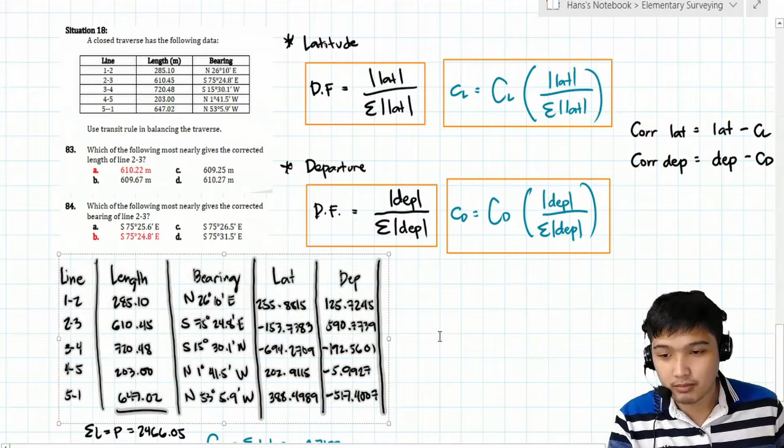Proceed tayo sa sample problem number 18. A closed traverse has the following data. Yung data dito class is the same lang doon sa last problem natin, sa situation 17. Kinopya ko na lang ulit itong mga nasolve natin before, yung initial latitude at departure nila, pati yung mga corrections. Alam mo na yan class, inulit ko na lang. So, use transit rule. Ang tinatanong, which of the following most nearly gives the length of line 2,3 and the bearing of line 2,3. Same lang class.

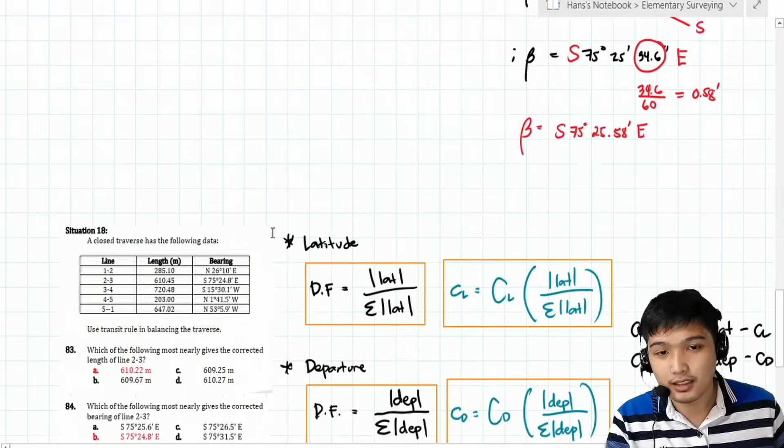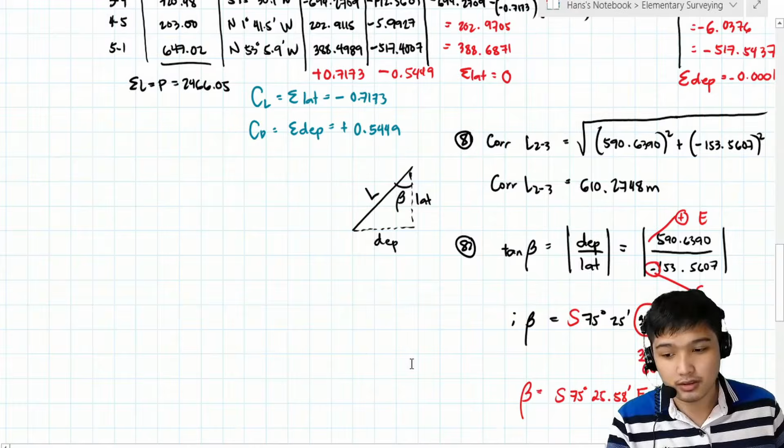Ngayon, recall lang natin ano nga yung na-solve natin last time. Yung bearing is ito, 75°25.6'. At yung length niya, ito, 610.27. Hindi natin naasahan class na same yung bibigay niyang result kasi different methods.

Okay, start tayo class. Recall natin that magkaiba yung distribution factor sa transit rule. Yung transit rule is iba yung distribution factor niya sa compass rule. Dito, distribution factor kapag latitude ang pinag-uusapan, absolute value of latitude over summation ng lahat ng latitude, absolute value. Sa departure naman, ang basis ay yung departure niya, over yung summation ng lahat ng departure, absolute value.

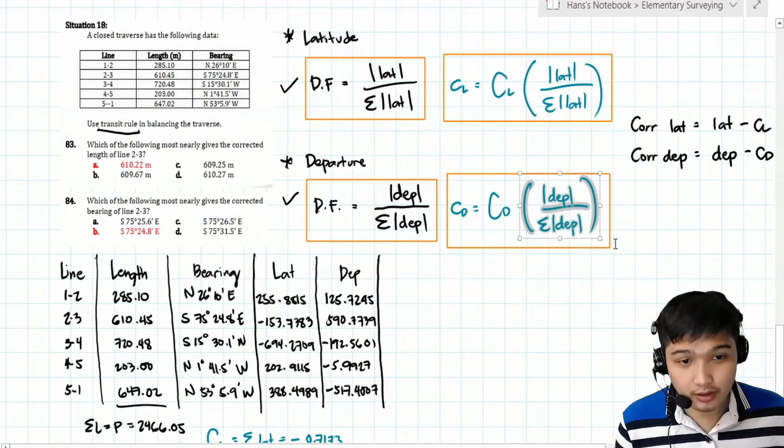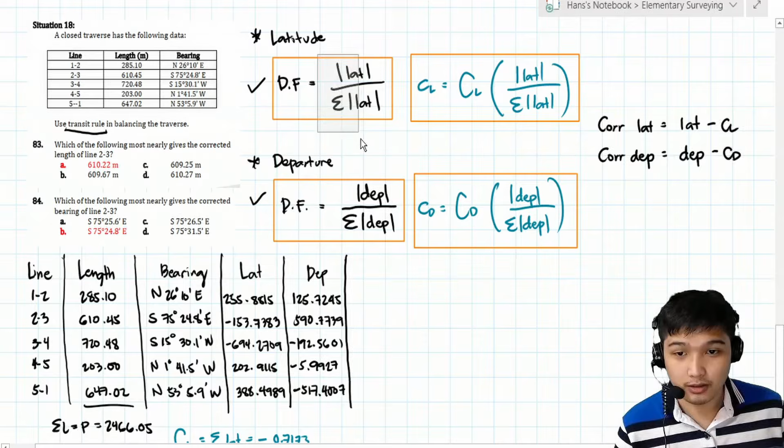Tapos, lahat the same na. So, individual correction, ayan, total correction times the distribution factor. And then, therefore, the correct latitude and departure is yung erroneous latitude and departure nila, minus yung individual correction. Ibig sabihin kung ano yung ginawa natin last time, ganun lang din dito. Ang magbago lang is itong distribution factor. Okay, start tayo class.

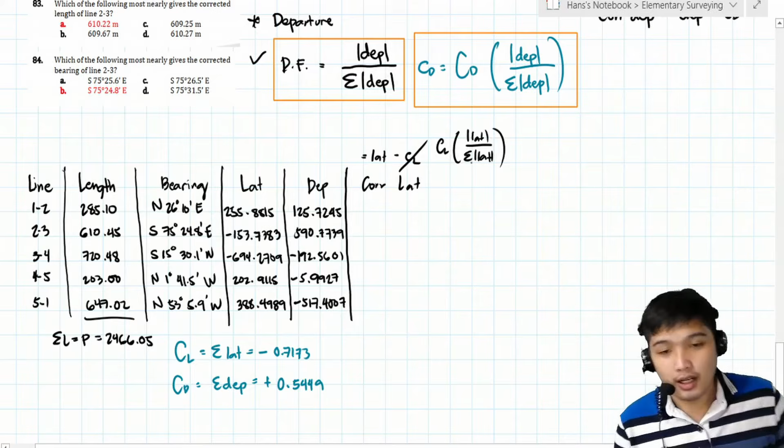Baba ko lang ito. Gagawa tayo ng additional column para sa correct latitude. That is equal sa dati niyang latitude minus correction sa latitude, which is yung capital CL times the distribution factor, absolute value of latitude over summation ng lahat ng absolute value ng latitude. Ngayon class, wala pa tayo nito, yung summation ng lahat ng absolute value ng latitude. Kunin muna natin yung class.

Ilan ang summation ng absolute value ng mga latitude? Without consideration ng mga sign. Ilan yung summation ng mga latitude class? Sagot is 1695.3011. Pa-verify na lang class.

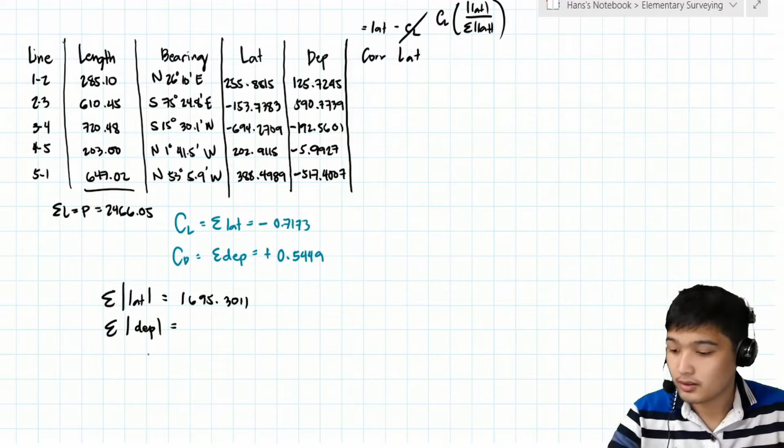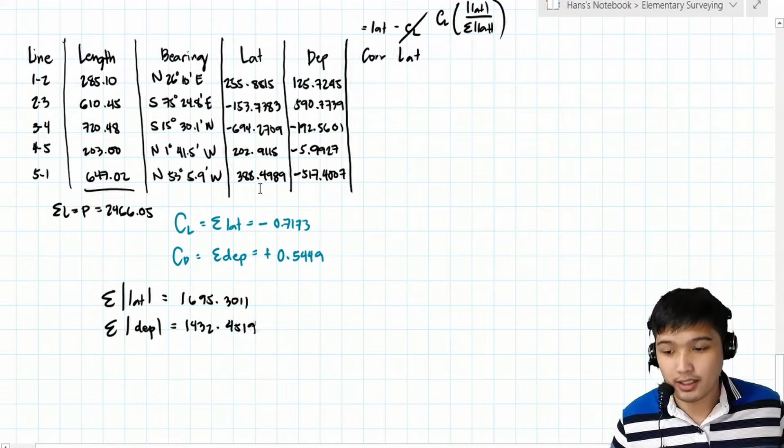Tapos, kunin na rin natin yung summation ng lahat ng absolute value ng departure para sa mamaya. Ilan yan class? Sagot is 1432.4519.

Okay, start tayo class sa correction o corrected latitude. Paano yun? This one is equal sa previous latitude niya, yung 255.8815, minus yung correction. Asan yun class? Ito yan, di ba? Minus negative 0.7173, at distribution factor, latitude niya, pero absolute value. Yung positive sign lang yung kukunin natin.

That is 255.8815 divided by yung summation, yung 1695.3011. Ilan yan class? Ilan yung bibigay na corrected latitude? So that yung corrected latitude equals 255.9898. Nakuha ba yun, class?

Ulitin natin sa next line. That is yung previous latitude niya, yung negative 153.7383, minus. Copy lang natin siguro, ito. Ang magbabago is what? Itong numerator, magiging yung latitude niya, yung absolute value ng latitude niya. That is 153.7383. Ilan yan, class?

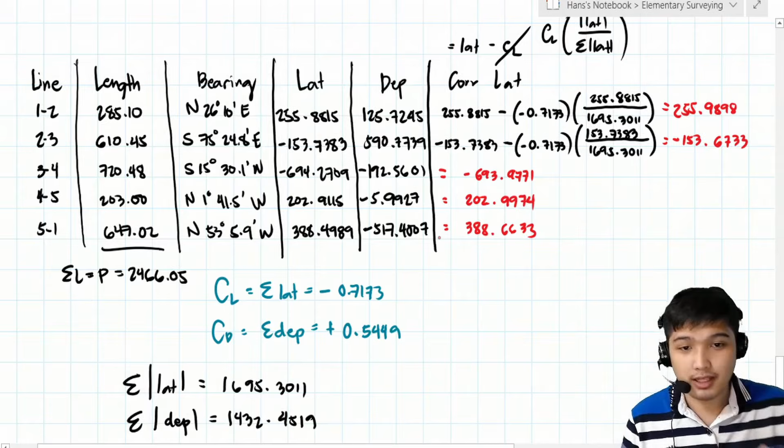Okay, ayun na, class. To verify na tama yung nakuha nating values, gagawin natin yung ginawa natin last time. Dapat yung magiging bagong summation must be equal to 0. Sige nga, class, try natin. Kunin yung summation ng mga bagong latitude. Ilan yan, class? It's either 0 or near 0 due to rounding off. Okay, so that is almost 0. Lumabas is 0.0001.

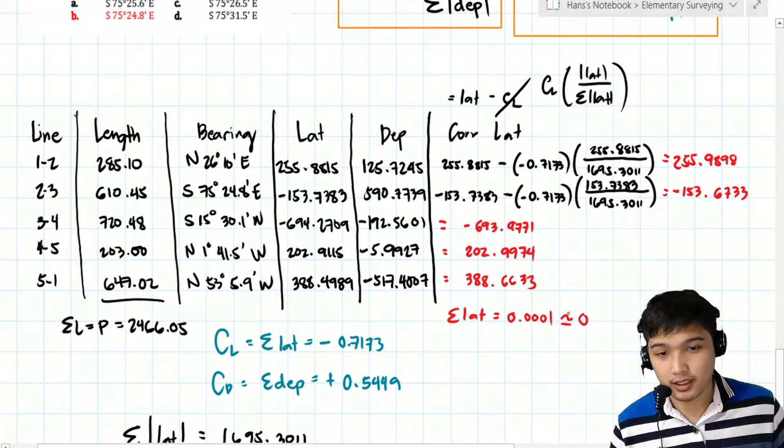Okay, so pwede na yan. Next, proceed tayo sa correction naman for the departure. Additional column for that. Correct departure ay equal sa dati niyang departure minus yung correction sa departure, na equal sa total correction sa departure times the distribution factor, absolute value ng departure, over summation ng absolute value ng departure.

So almost the same, class. Titingin lang naman tayo dito sa departure. So let's say for line 1,2, that is 125.7245 minus, ano yung correction para dito, class?

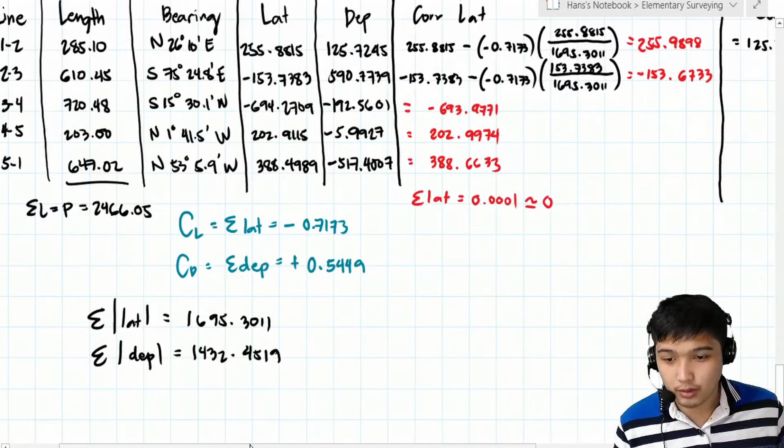Saan yan? Ito yun, no? 0.5449. So lagay natin 0.5449 and then times absolute value niya, 125.7245, and then divided by. Nasolve natin yan, class, that is 1432.4519. Tama ba?

Okay, so correct. Yan. Input nyo lang sa calculator. So ilan ngayon yung corrected departure. Okay, so sagot 125.677. Gawin pa ulit natin siya sa next line.

Para sa line 2,3, ilan yung departure niya? That is 590.7739. And then minus, copy natin tong correction. Papalitan lang natin, yung numerator na equivalent sa absolute value ng departure niya, which is 590.7739. So ilan yan, class? That is 590.5492. Gawin na lang ulit natin siya sa mga remaining lines.

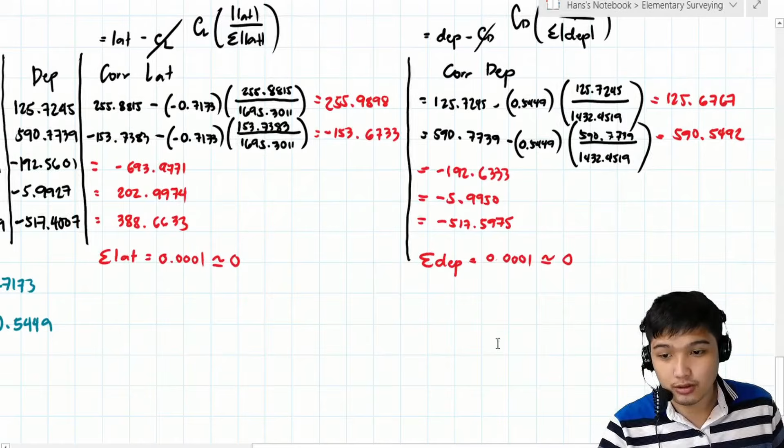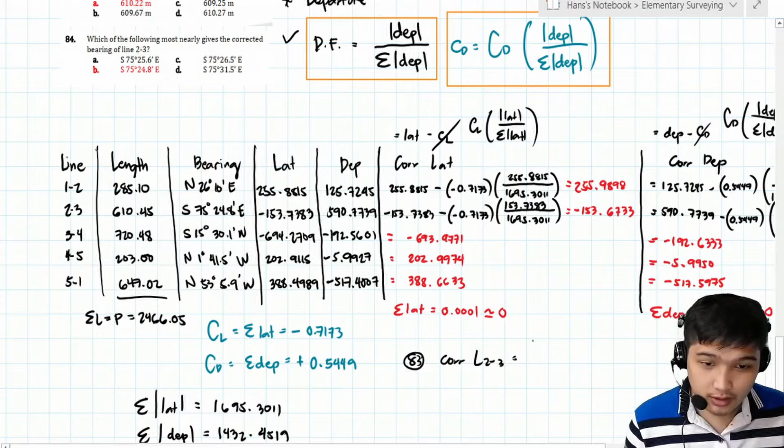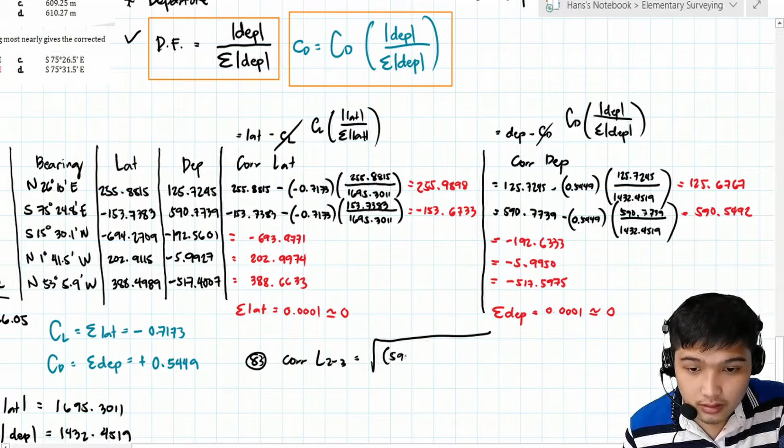Ngayon, balik tayo dun sa question. Number 83, corrected length of line 2,3. Ayan, the same na lang ng last time, no? Yung corrected length ng line 2,3 ay equal sa square root ng bago niyang departure squared and then yung bago niyang latitude squared. So ilan yan? Okay, sagot is 610.216 or 22 meters.

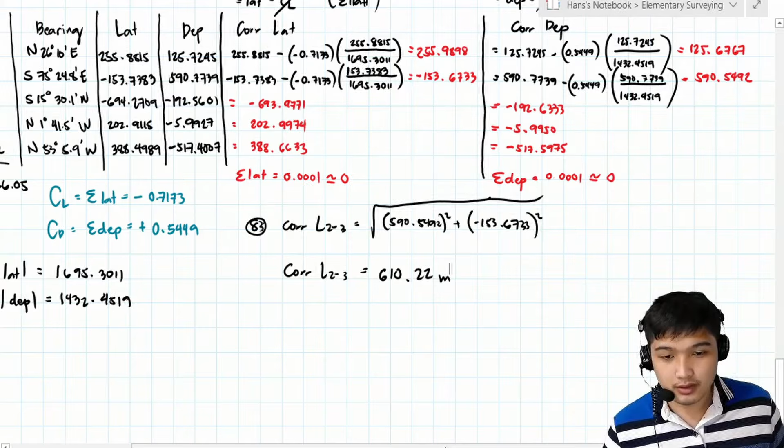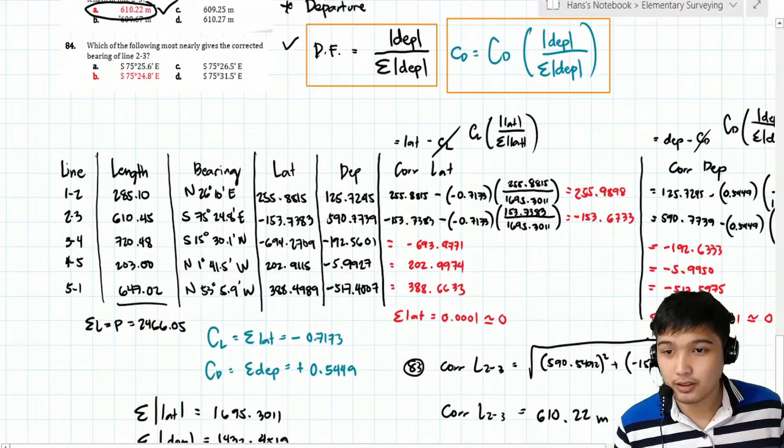Tama ba tayo, class? Correct line? Okay, so correct, no? So that is letter A. Next, which of the following most nearly gives the bearing? Ginawa na rin natin yan last time, ulitin na lang natin.

Para sa 84, diba that yung tangent ng bearing ay equal sa absolute value ng departure over latitude. Lagay lang natin sila, so that is yung 590.5492 divided by negative 153.6733. So that yung bearing ay equal sa 75.4139, or in degree minutes seconds, that is 75 degrees 24 minutes and then 50.13 seconds.

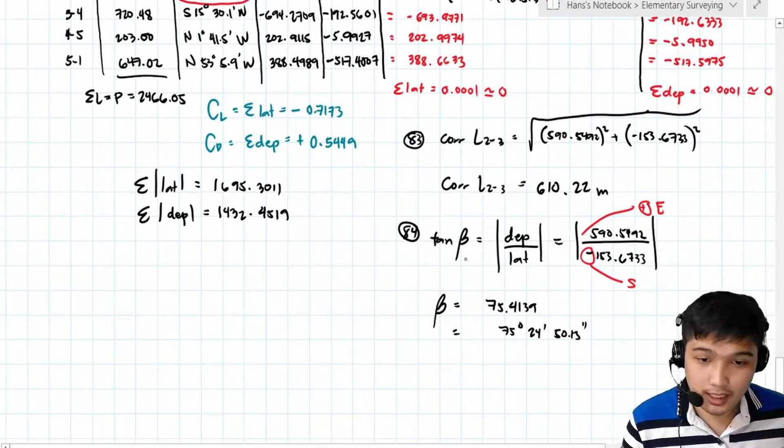Lagay natin, class, yung direction, no? Ano yung direction yan? Makikita mo yung departure is positive, so going sa east. Latitude is negative, so papuntang south. Pwede mong i-adapt nga again, no? Syempre hindi naman magbabago ng sobra yung direction niya before, which is eto. Dapat malapit lang tayo always, no, doon sa previous length niya. Ayan, malapit to, 610, hindi tayo masyadong lalayo diyan. At the same time, yung bearing hindi rin masyadong lalayo dito. Anyways, ilalagay natin na siya is south and then east.

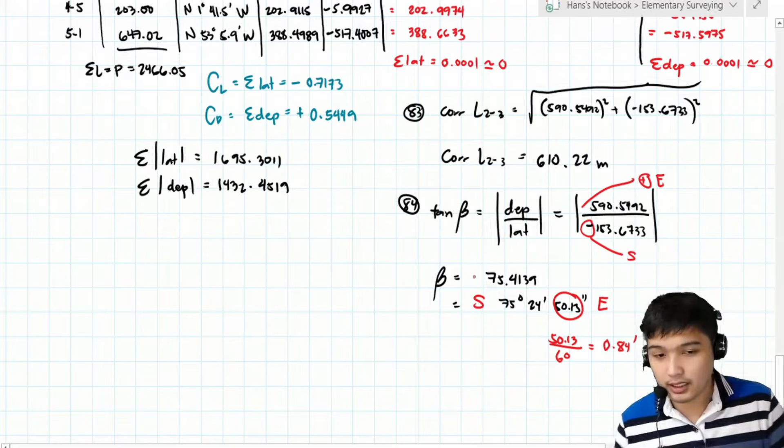Pero ang nasa choices again is naka-degree minutes lang. So convert natin ito in minutes, divide by 60. So that's equivalent saan? 0.84 minutes. Pwede nating i-write again yung bearing as south 75 degrees 24.84 minutes, and then east.

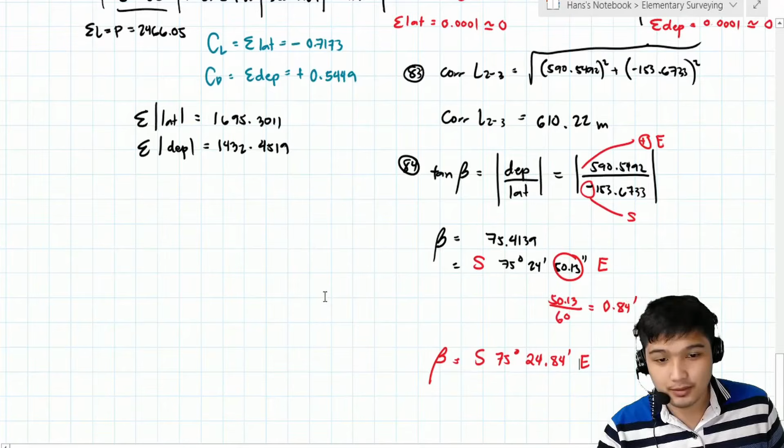Okay, so ayun, sana nasundan. Tama ba? Okay, correct, no? Parang lumalabas na yung bearing niya is hindi masyadong nagbago, no? Previous niya, 24.8, yun pa rin yung bago niya. Anyways, ayun, nakuha na natin class, na-correct na natin sila correspondingly, no, using yung kung anong method yung pinagagamit.

Okay, so I think ito na yung tamang oras, no? Kasi dito, napansin mo, mabilis lang, kasi kinopya-paste natin eh, 'di ba? Meron tayong tawag dito, reference na yung sa compass rule. Nasagot na natin yung latitude sa departure niya, kaya konti lang yung time na nagamit natin. Pero kung ito lang yung tinatanong class, transit rule lang, no, eh di gagawin mo pa rin yan isa-isa, so doon mauubos nga yung oras natin.

Class, lalo na sa board exam, gusto natin as much as possible na marami tayong time na matitira para balikan yung mga hindi pa natin nasasagutan, o i-resolve yung mga nasagutan natin pero feeling natin medyo na-tricky pa siya. Ibig sabihin, ang gusto natin, no, nakakapag-reserve tayo ng maraming time sa board exam.

So paano sagutan yung topic na ito? Using yung calculator lang ninyo. So yun yung ipe-present ko ngayon class. Sige, wait lang. Okay, so pa-open ng mga calculators ninyo.

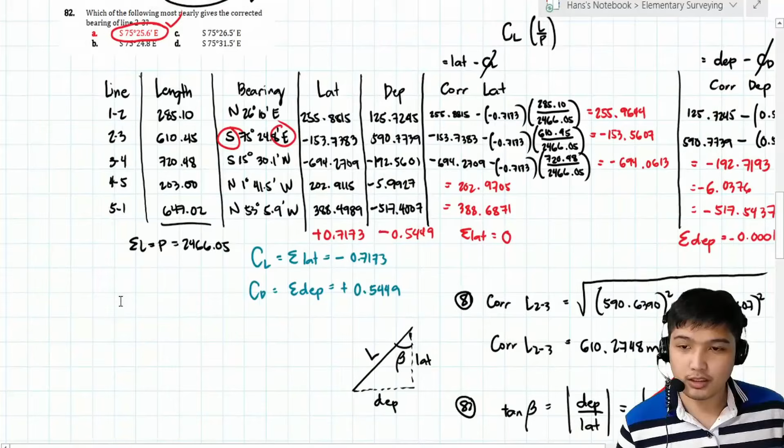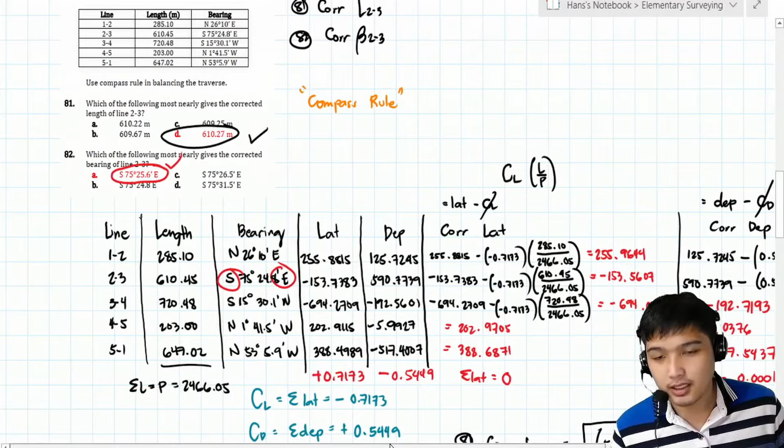Okay, so balik muna tayo dito. So what if ito yung pinag-uusapan, no? Yung compass rule. So lagay natin compass rule. So ano yung ginagawa class? Alam niyo naman na to.

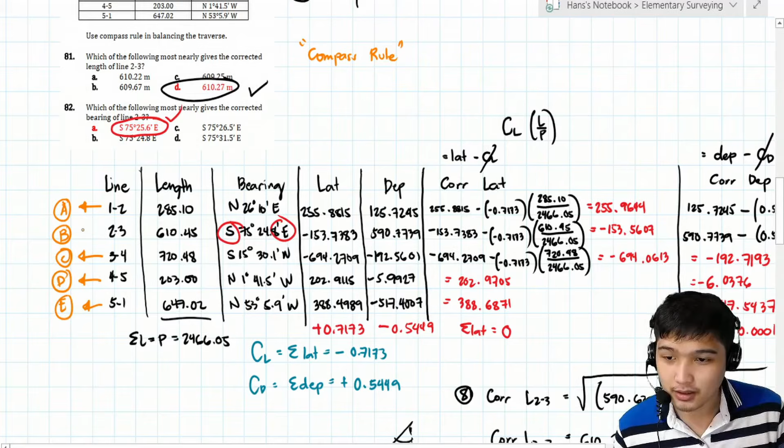So ang gagawin natin, i-store natin yung mga lines natin sa calculator dun sa mga variables A hanggang E kasi 5 lines to eh. So this one is store sa A, sa B, sa C, sa D, and then sa E. Nagawa na natin yung last time eh. So sige, practice tayo. Zoom in ko to.

Okay, practice. So for line 1, 2, that is R angle theta yung gagawin natin, di ba? Yung R is 285.1. Ano yung angle class? So that is northeast, di ba? Or north papuntang east. Yung theta niyan from the positive x-axis is 90 minus yung angle 2610. Hindi ko na to i-elaborate kasi nga naturo ko na to eh nung sa last video natin.

Kung hindi mo pa siya nasundan, punta ka lang dun sa video na yon, no? Dito, papakita ko na lang yung syntax. Okay, equals mo. So lalabas diyan yung ayun. Ito yung departure niya, yung 125.

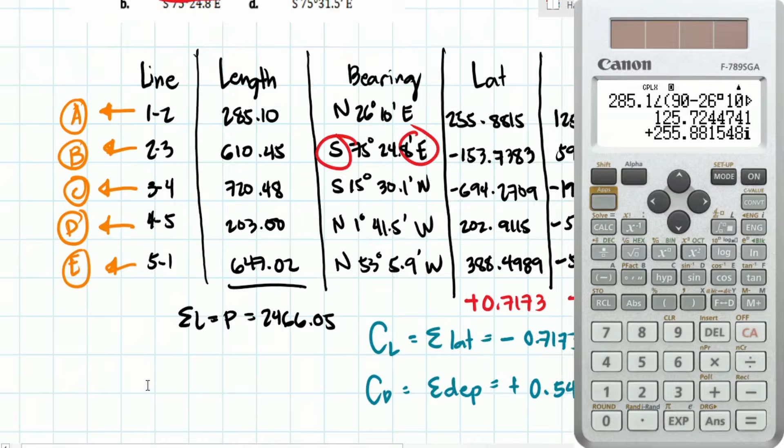So nasan ba 'yan? Ito yun no, 125. Kita ba sa screen? Hindi. So ito siya. 125 and then yung latitude niya na 255, o ito naman 'yon. 255.8815. Sabi ko nga nagawa na natin yan before. So store sa A. Okay, so next.

610.45 and then angle. So siya is south pa east. So that is 270 plus yung 75. Okay, equals, ayan, makikita mo. So 590 negative 153. Store sa B.

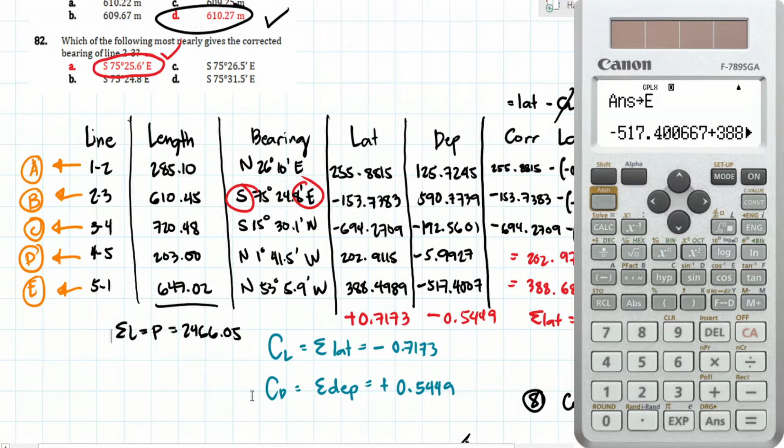Ayun, gawin lang natin siya sa lahat ng lines natin. Sige po. Okay class. Na-store na natin sila sa A, B, C, D, and then E.

Ngayon, ang next na goal natin is kunin itong correction. Okay? At para makuha yung correction na yan, paano yung ginawa natin? Di ba, pinag-plus-plus lang natin lahat ng latitude. So lumabas tong negative. Pinag-plus-plus lang natin lahat na itong departure. So lumabas itong positive 0.5449. So ibig sabihin, lumalabas na para makuha natin sila, edi.

Pagpa-plus-plusin lang din natin itong mga A, B, C, D, E. Okay? So click natin yon A plus B, plus C, plus D, and then plus E. And then, yung sagot niyan, i-store natin sa letter F, corresponding nga dun sa pinagsamang CL and then CD. So check nyo class, gawin natin sa calculator yan.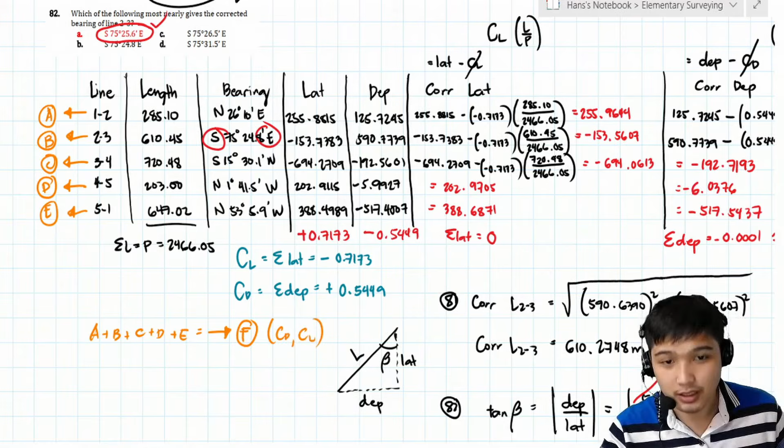Ayan, A plus B plus C plus D, and then plus E. So ilan yan class? Ayan, lalabas, no? Yung CD na 5448 nga siya dito kasi exact na to. And then ito, 0.7173. So may konti lang discrepancy kasi nga, itong nasa calculator, exact yan, hindi ka nag-round up. So sabi ko, store mo yan sa letter F.

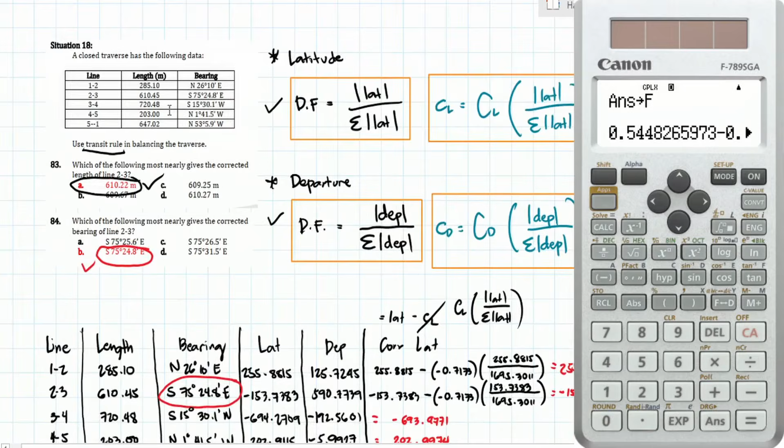Okay? Ngayon, yung ginawa natin yan class, na pag-store sa A, B, C, D, E, saka yung pag-store sa F, is applicable din dito sa transit rule. So punta tayo, no? Paano yung syntax na gagawin kapag compass rule tayo?

So ayan, dito natin sulat para malinis. Kung marirecall mo class, di ba, that yung correct latitude using yung compass rule ay equal saan? Dati niyang latitude minus yung correction sa latitude and then times the distribution factor na L over P. Okay? Para naman sa correct departure, so that is equal sa dati niyang departure minus yung total correction sa departure and then distribution factor na L over P.

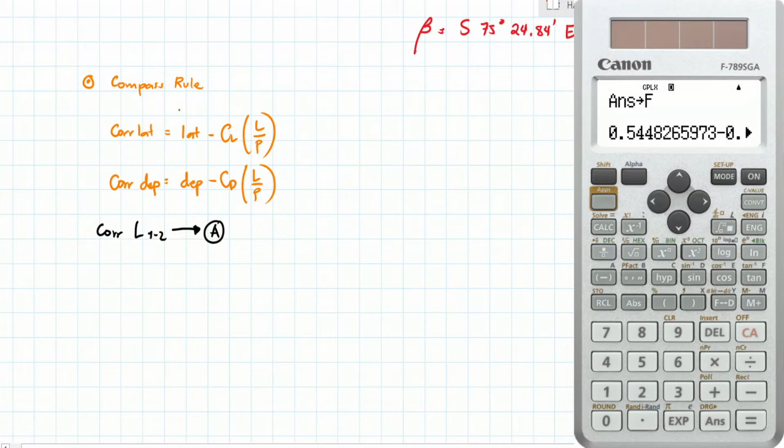Okay, so paano natin class i-apply or ipapakita yung syntax niyan sa calculator? So let's say for example, okay, pinag-uusapan natin yung correct length nung line 1, 2. Okay, di ba yung line 1-2 class, yan yung nasa A, nakastore sa A. So ibig sabihin, kokopyahin lang natin to. So paano nang gagawin yan, class? Para makuha yung correct length niya, o correct latitude and departure, paano yung gagawin?

Ganito, class. Equal yan sa letter A para dito, diba nakastore sa A yan? And then, minus. Saan nakastore to, class? Yung CL saka CD? Sa F, diba? So minus F and then times. O, paano makukuha yung length nung line 1, 2? Eh di, kung nare-recall nyo, that is equivalent sa absolute value nung letter A, di ba? Sa last, natin, class. Nagawa na natin yan eh.